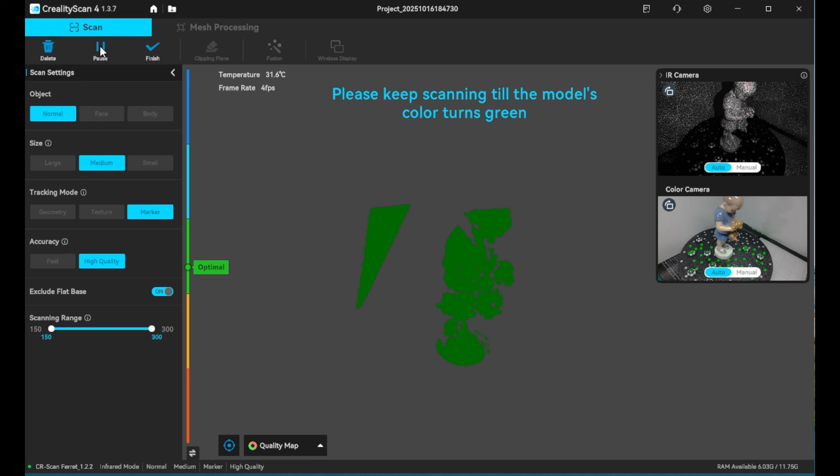Now it's green, that's what we want to see, so I'm going to go ahead and click start. And then I'm going to slowly start turning the turntable that I have my object on. And you want to make sure that it stays green. You want most of your object to eventually become a green color.

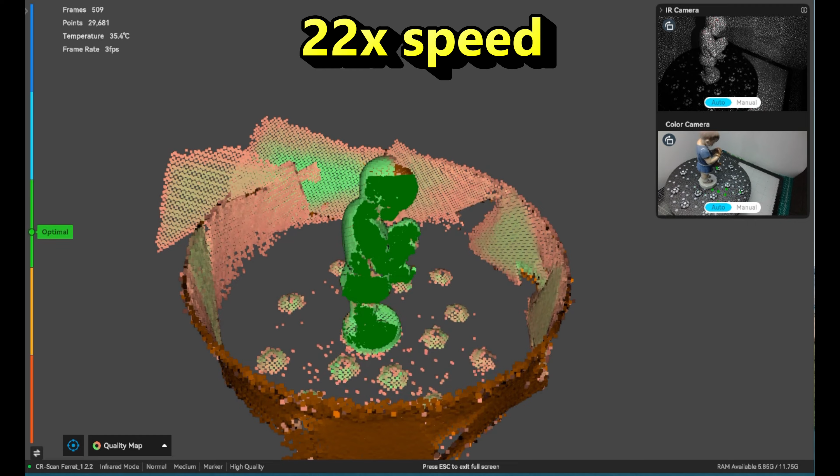And as the turntable is rotating, I'm going to be lifting the scanner up and down to try and get different areas of the model scanned. And whenever it turns red, I'm going to try and back it up to where it last was green to try and get as complete a scan as I can.

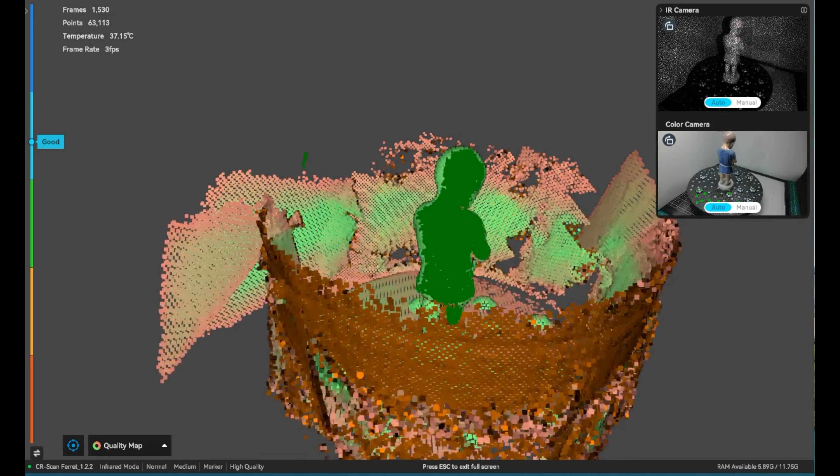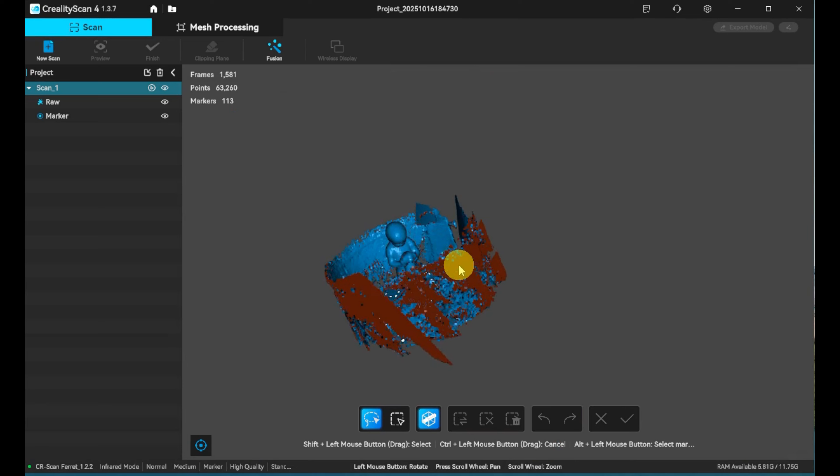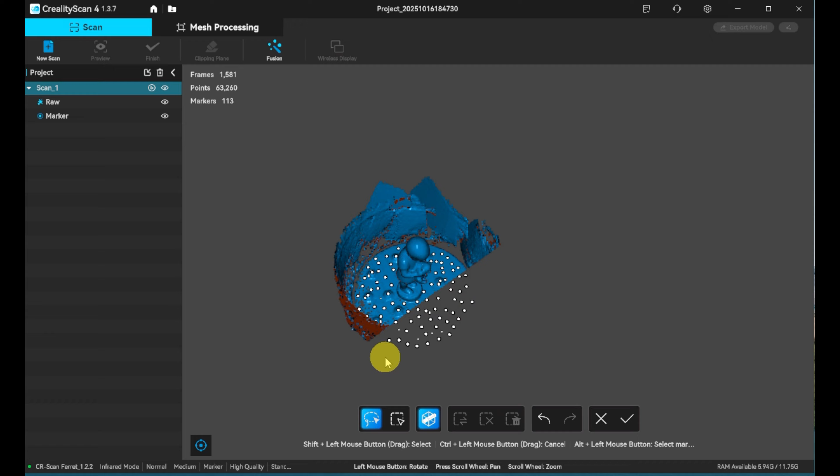Okay, now what we will do is we will finish this scan, take a quick look at how it looks. Let's get rid of some of this extra stuff. I'm going to use these two tools down here, the lasso tool and the rectangle tool. I'm going to hold down the shift key and I'm going to just select those and then delete the selection. And this way I'm going to just kind of clean it up a bit.

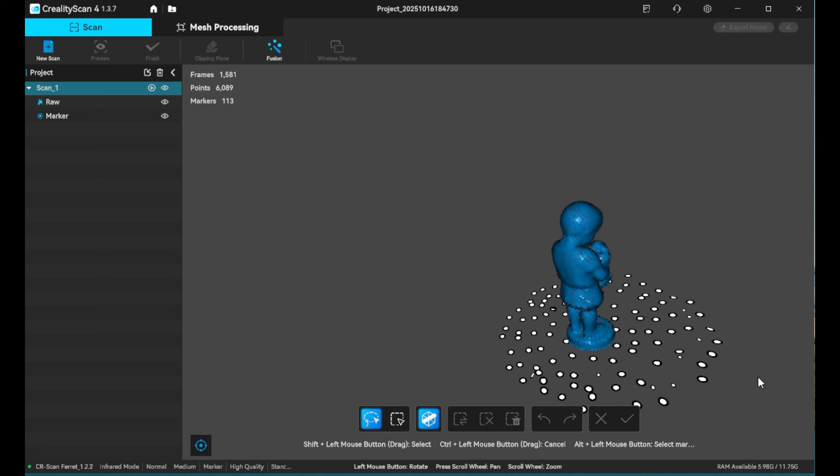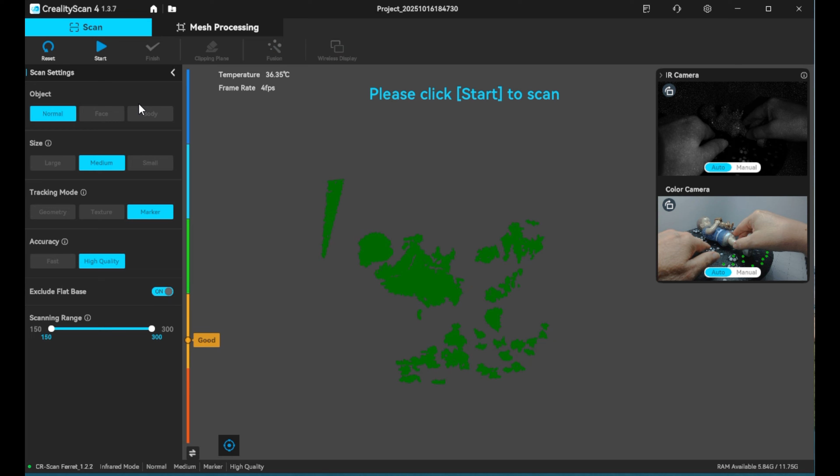Okay, and then it's very important when you're finished with that to make sure you click this check mark to save your edit. Now I'm going to do a new scan and we're going to preview. And I am going to lay the model on its side like this. And we're going to do a scan this way.

So I'm going to start, and then I will slowly turn the turntable. And once again, I'm going to move the scanner around while the turntable is turning, and I'm going to try and keep everything green and scan as much as I can until I get as complete a scan as possible.

Okay, and we'll go ahead and finish this one. And once again, I am going to do a quick cleanup of this. Okay, and that looks pretty good. We'll go ahead and save that edit. Now I'm going to do another scan. Let's preview it.

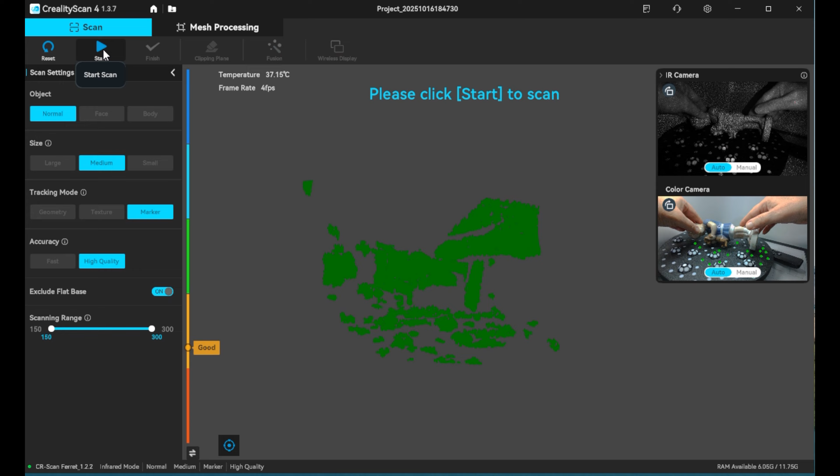And we'll put our camera up. And this time, I'm going to turn it this way. And we'll start. All right. And we will finish.

And I'm going to take away the marker view and let's clean this up. Okay. And once again, don't forget to save. Okay. Now I'm going to select all three and we are going to fuse them.

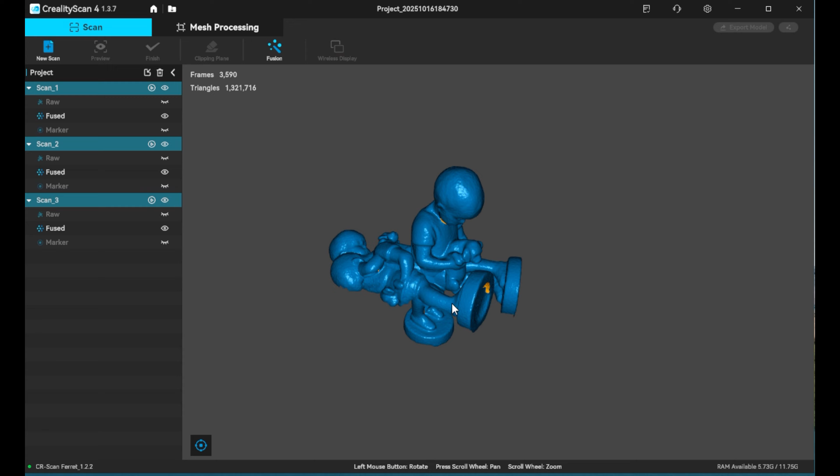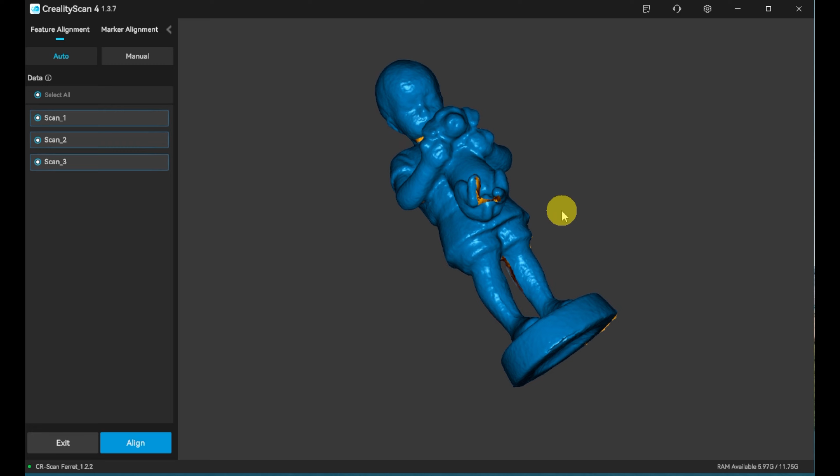Okay. Now that they are all fused, we're going to come up here to mesh processing. We're going to come to alignment and we are going to align them. Okay, and then let's take a look at it. It looks pretty good. There are some small holes. As you can see, there's a little hole in the neck and under the body and a little in the base here. So how we'll take care of that is we'll exit out of here.

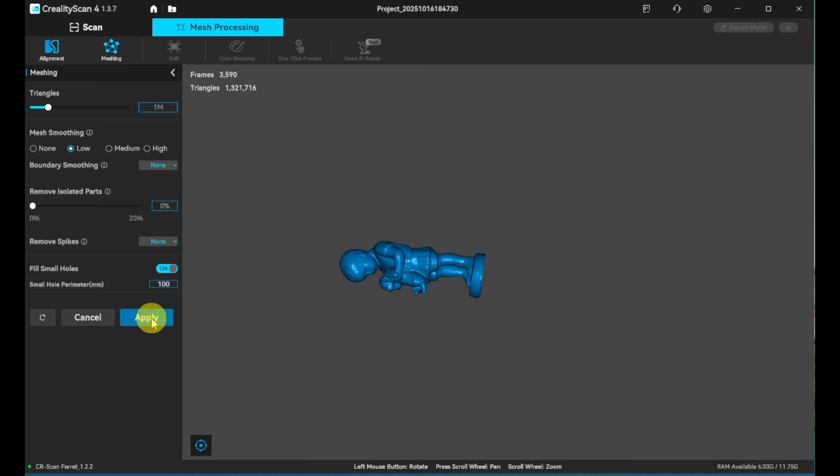We're going to come to meshing and small hole perimeter. I'm going to change this to 100. Mesh smoothing, I'm going to put on low and apply. And then let's take a look at that. That looks good. It looks like it closed all those holes up. So that looks very good.

So I'm going to export the mesh and we'll call this Little Boy Holding Dog. And we're going to save it as an STL. Okay.

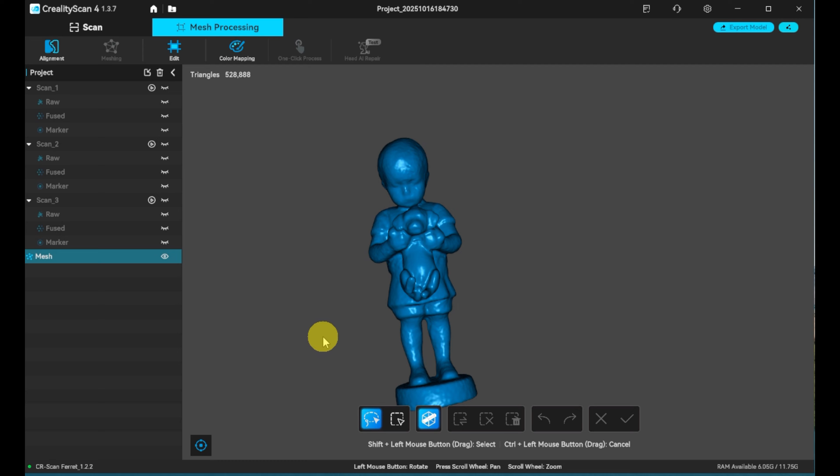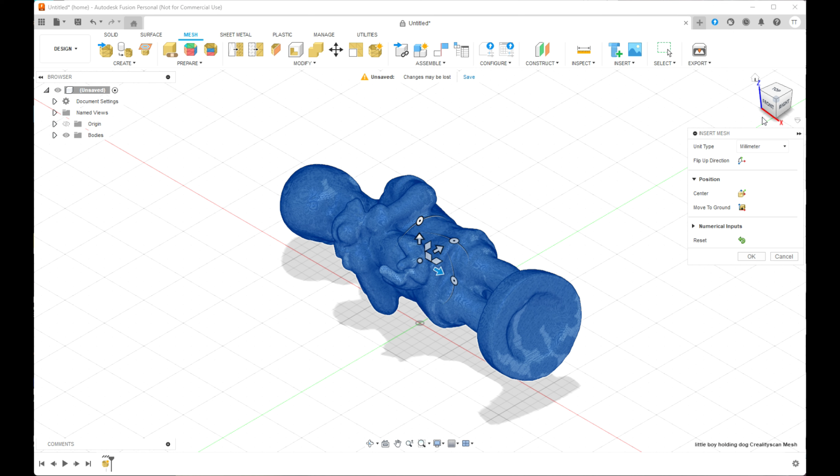Okay, now I'm in Fusion 360. I'm going to click on the Mesh tab. We're going to come to Create, and we're going to insert a mesh. And we are going to insert the mesh that we just created in Creality Scan. Now, with the Insert Mesh box open, don't hit Enter at any time or you'll lose the Insert Mesh dialog box. But right now I'm going to center it, and I'm going to move it to the ground, and I'm going to come and look at the front view, just so that I can keep things straight.

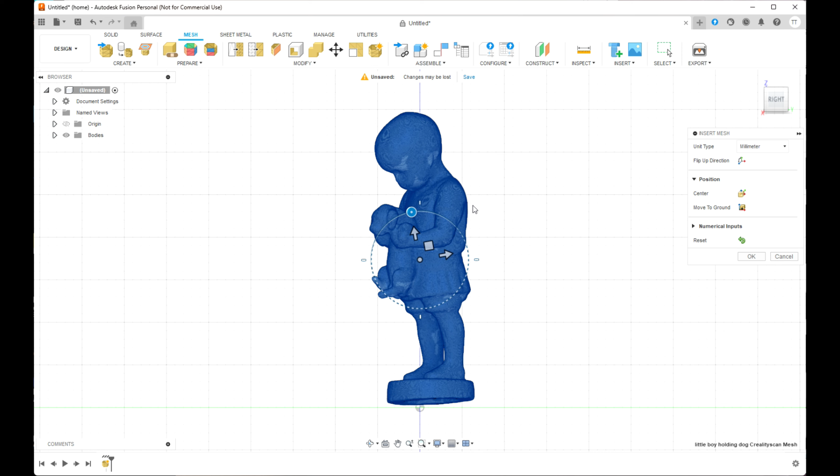Now I'm going to want to position this, and so I'm going to rotate it. Just like that. Let's move it to ground again. And I want to look at it on the plane. We can look at it right. And I'm just going to keep rotating this until it looks relatively flat.

And it looks like this needs to go a little bit that way, and that's too big. So if we hit the numerical inputs, let's maybe do a -1. And remember, don't hit enter, just type in the number. Let's try 1.5. Let's try -2. Yeah, -2 looks good.

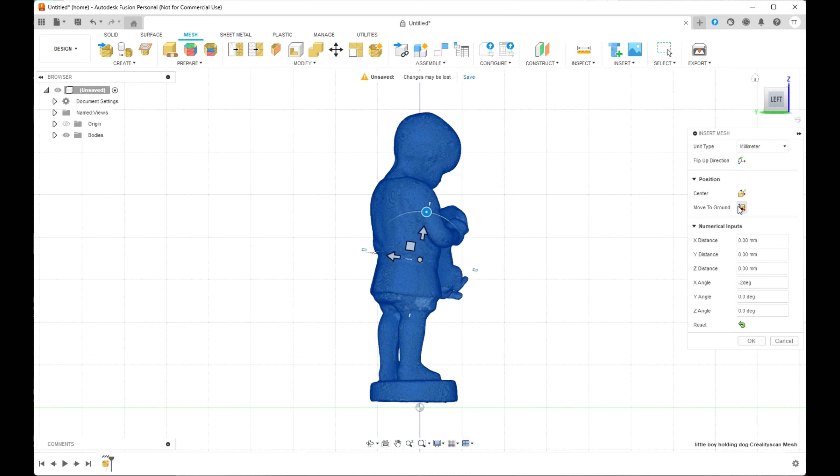And then we'll look this way. So that looks pretty flat to the plane all the way around. And then I'm going to move to the ground again. So now we are on flat on the ground. And so I'm going to click OK.

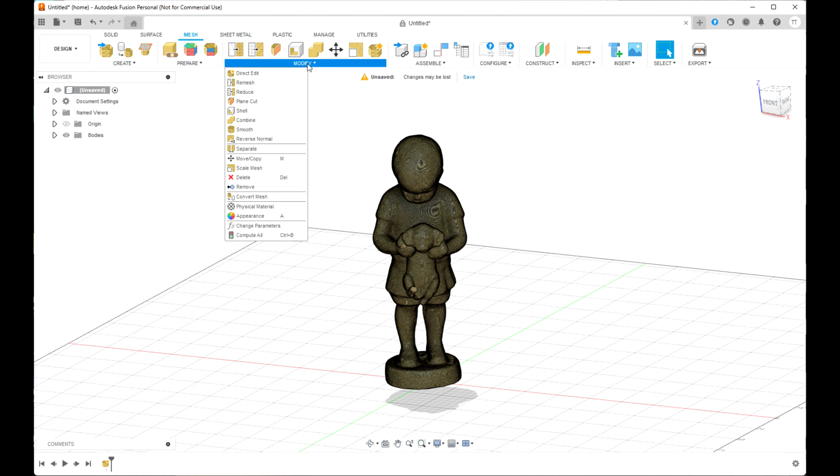Now I want to make the base flat. And so I'm going to come up here to Modify, and I'm going to do a plane cut. I'm going to select our body, and we want to select this bottom plane. So I'll select the bottom plane.

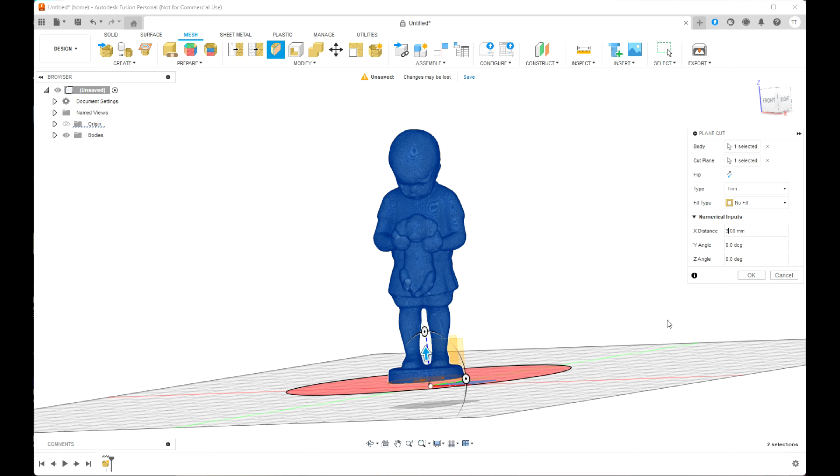And then I'm going to just pull the arrow up, which of course that is too far, although we could probably get away with this. I don't want it quite that far. I want a little more of a base for this boy. So maybe try 4, maybe 3. And you can see that will give us a flat base. So I'll click OK.

Let's go to Move, Copy. Let's hold this little boy. And let's get the front view again. And I want to bring it down to the plane.

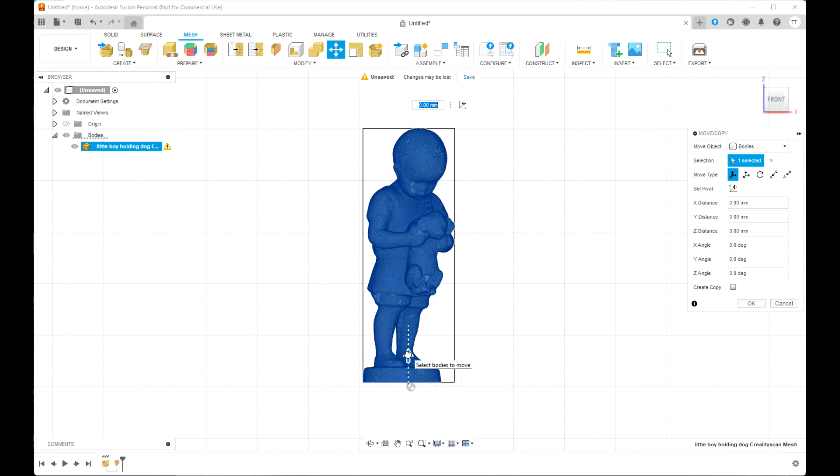So that's a little bit too much. Let's see if -4, that's a little bit too much. -3. Okay, that looks like that's flat on the plane, or pretty close.

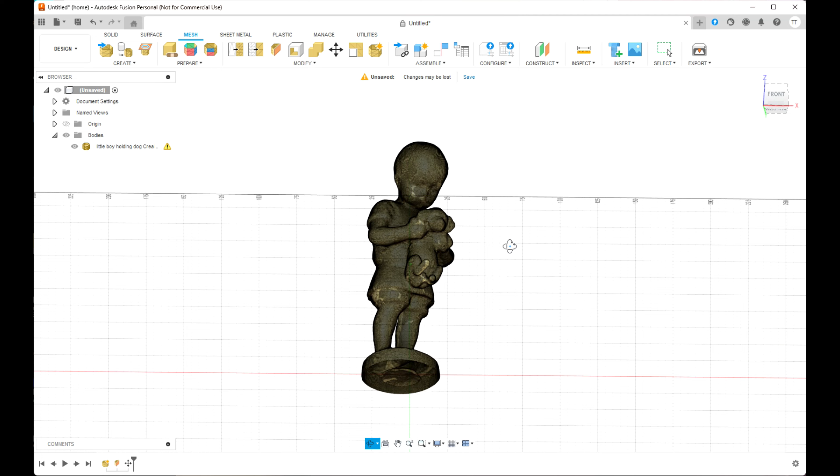So I'll click OK. Now you'll notice that we have a little error message here. And that's because when we cut on the plane, that put a hole in the bottom. And so we're going to need to close off that hole. So click on the little icon here.

We want to make sure that our item is selected. The repair type is we're going to close holes. And then just click OK. And so that has closed off the bottom and removed the error message from here.

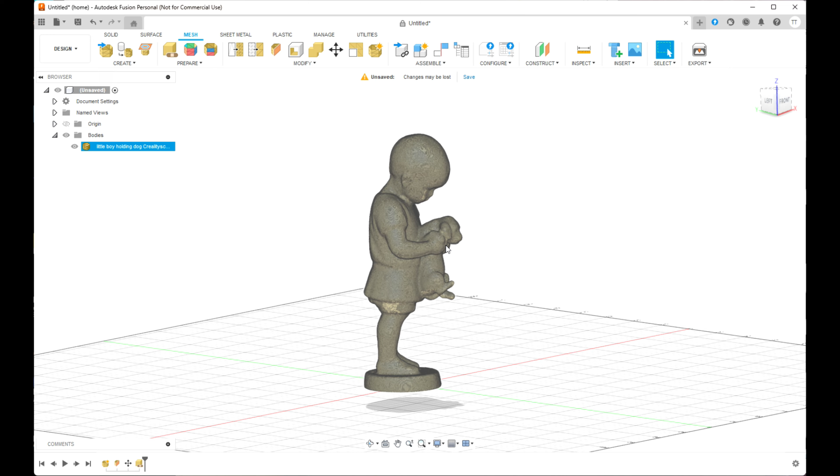Now we can probably just export this right now, especially with Bambu Studio. Even though this item is hollow, Bambu Studio is going to recognize it as being solid, and so it's going to put infill on the inside.

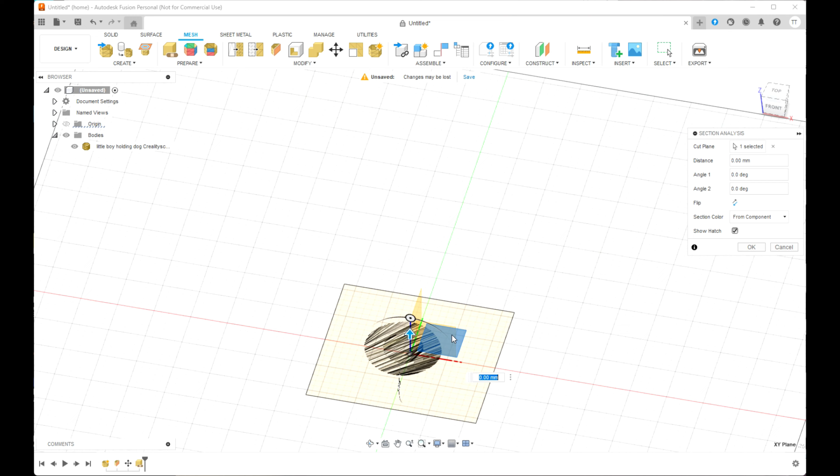And to show you what I mean, we're going to come up to here to Inspect and Section Analysis, and we're going to select this bottom plane. And as we come up, you can see we're hollow.

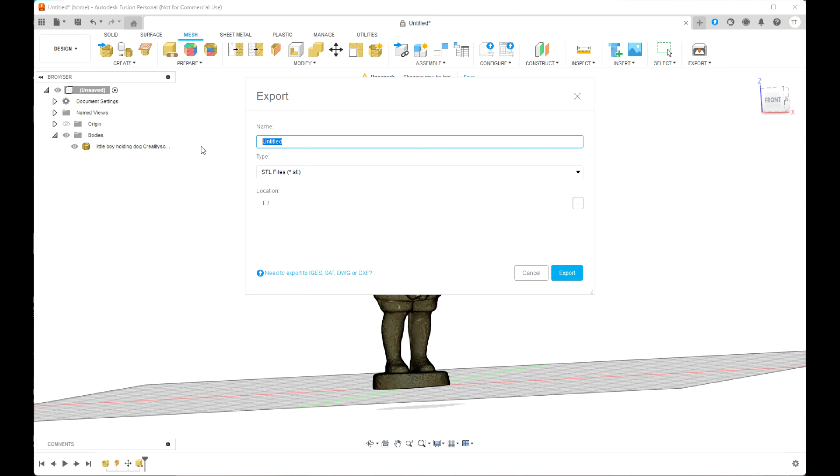And as I said, with Bambu Studio, we could go ahead and export this right now as is. We could come up here to File and Export, and then we could export this as an STL file. And in fact, let's export it. Little boy with dog.

And even though this is hollow, I will show you in Bambu Studio we can import what we just saved from Fusion 360. And when we select it,

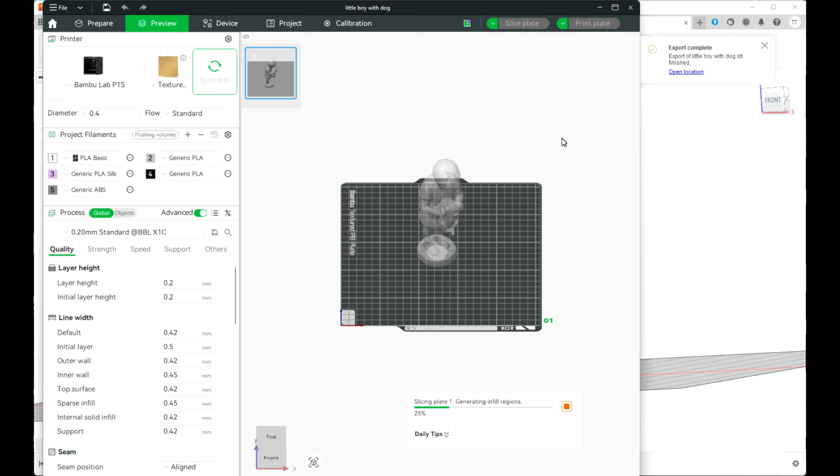Now this floating regions is because you really need to slice this with supports. I'm doing this to show you that it is putting infill. It's not going to print it as hollow.

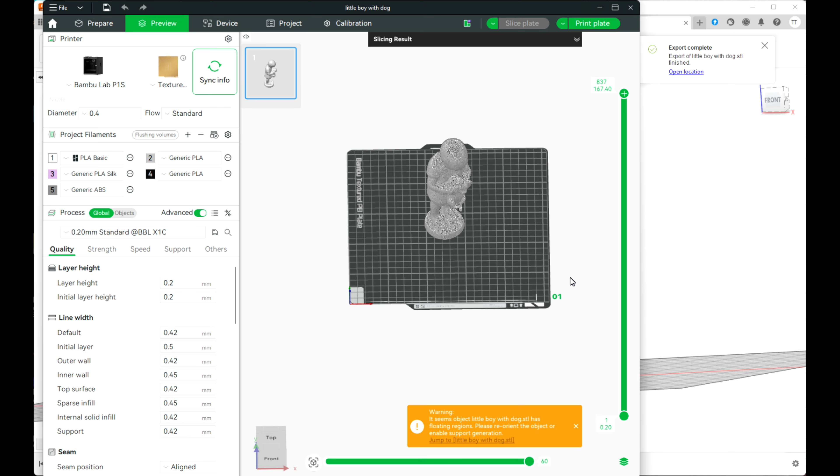And so at this point, especially if you have a Bambu Lab printer, I'm not sure about other slicers, but with Bambu Lab, you can use this as is and just turn on supports and slice it. And you're good to go.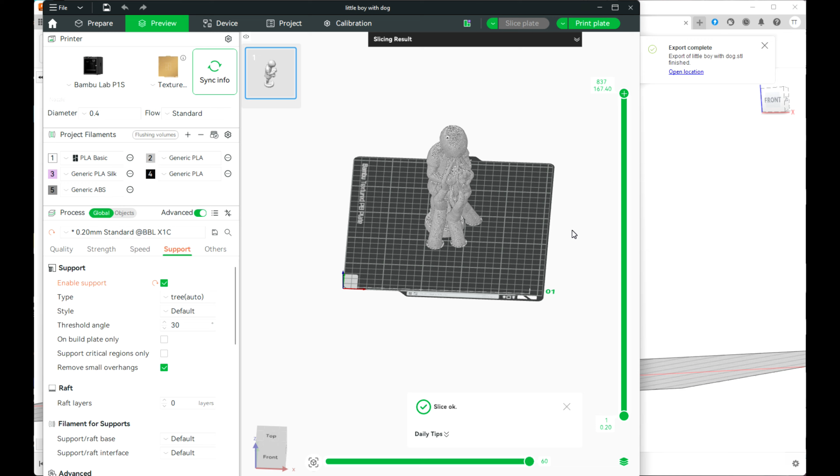We can change this to line type so that you can see where it's going to be putting supports. But in the event, if for some reason your slicer is trying to slice this as a hollow object, we can make this a solid object.

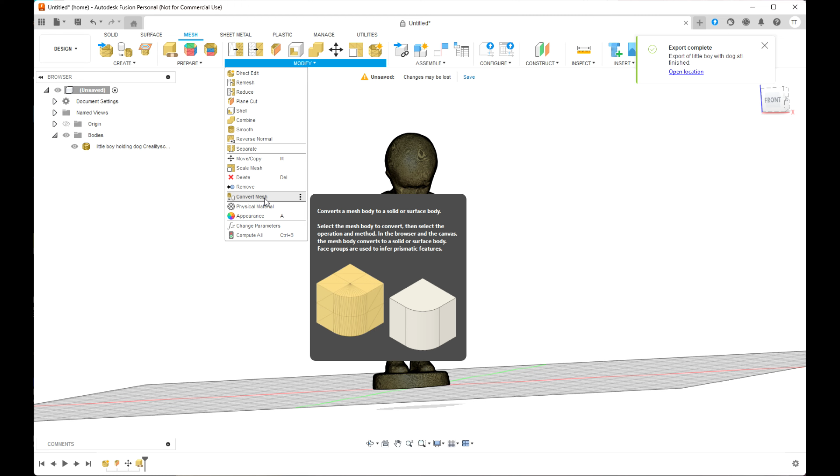To do that, we're going to come to Modify and Convert Mesh. It's going to be parametric and faceted. We're going to select our item and we're going to click OK.

Now, you may think it's not doing anything, but it is. You're just going to need to be patient. You may click OK again to see that it is really doing something, but just be patient and wait until it's finished.

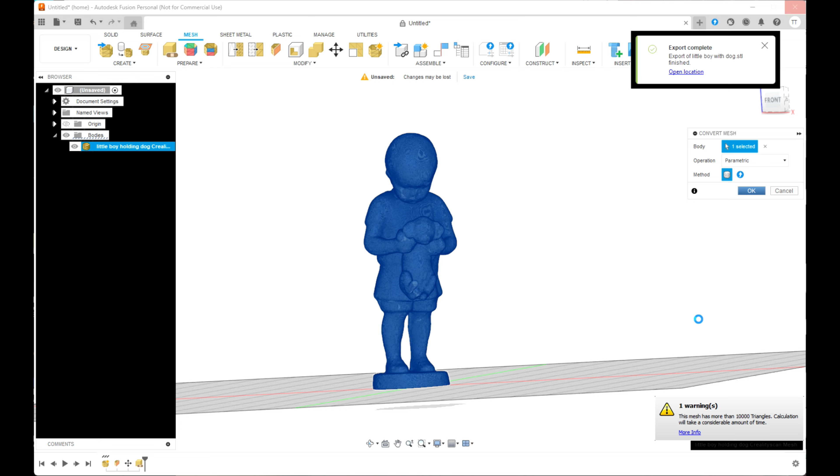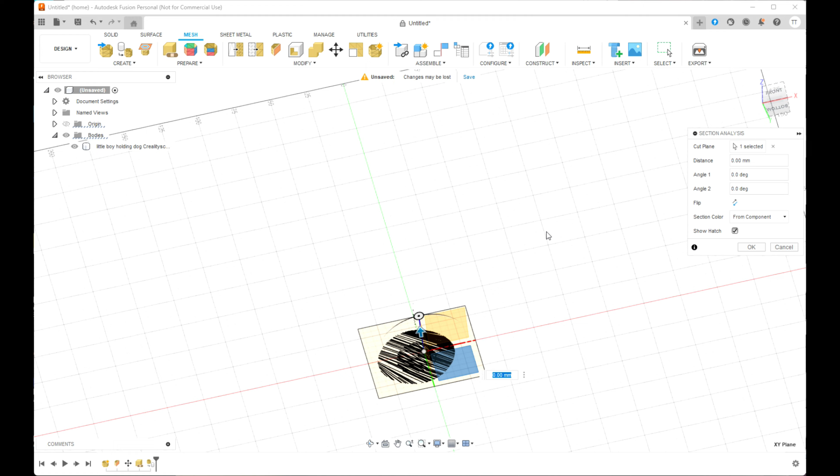Okay, when it turns black, it is finished. And to show you, we can inspect and we can do a section analysis. And once again, we want to select this bottom plane. And now as it comes up, you can see it's filled. And so that's how you can fill it.

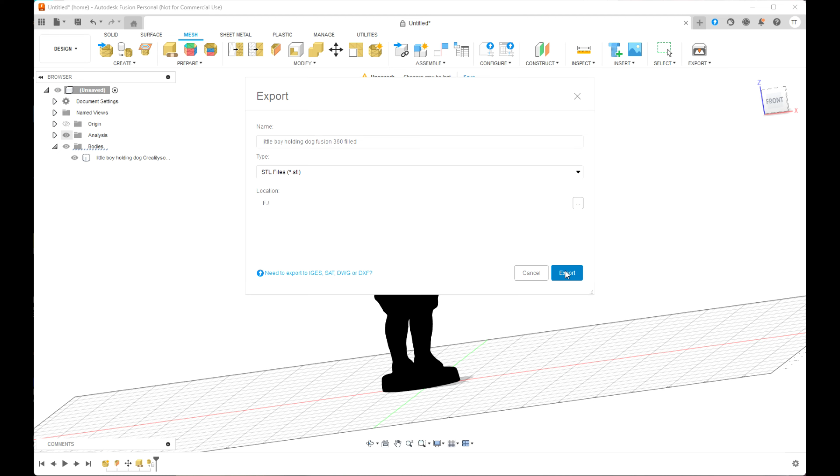And so we will come out here to File, and we shall export, and we'll call this Little Boy Holding Dog Fusion 360 Filled, and export. And so now we're ready to set it up in Bambu Studio.

Okay, now I have Bambu Studio open. The device I'm going to use is an A1 Mini, and I have got some generic silk PLA.

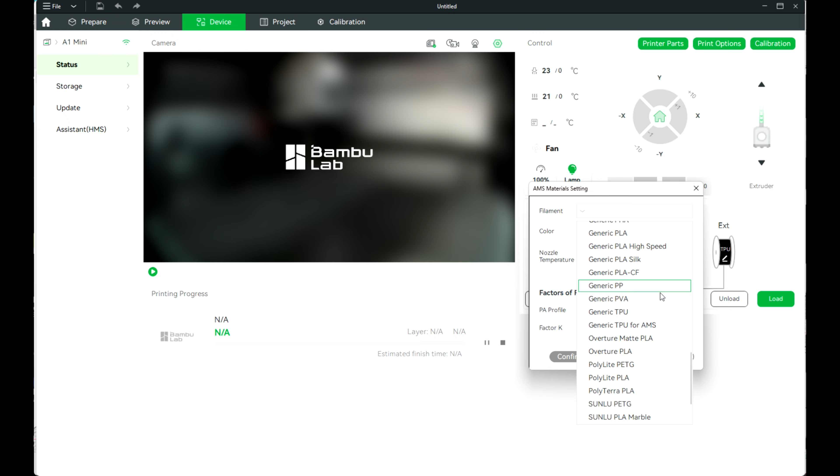And here I'm going to switch to my A1 Mini, and I will synchronize the filament, and we will import the file we just made. And that is right here.

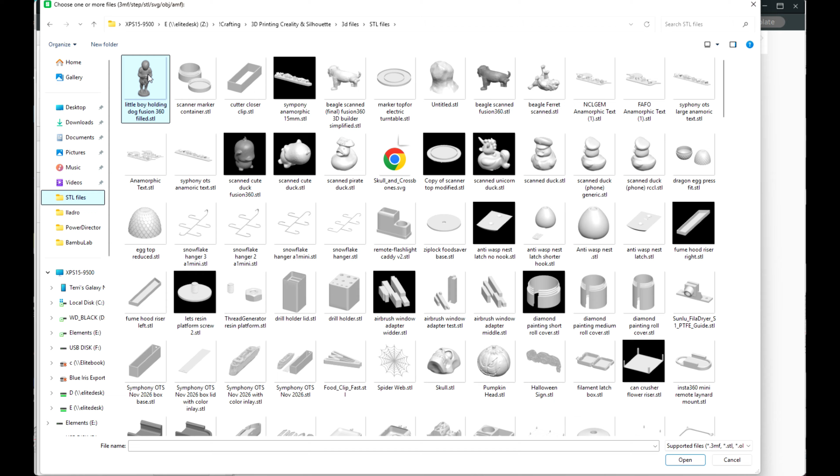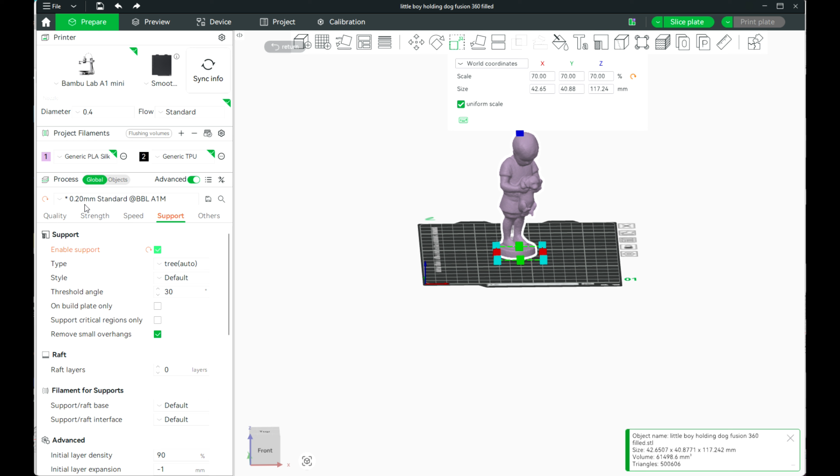Now to save on filament, I'm going to print it out a little smaller, so maybe at about 60%, or maybe 70% size. And I'm going to enable supports, and I'm using the 0.2 millimeter standard protocol, or 0.2 layer height, so that profile. And this is what it's going to look like.

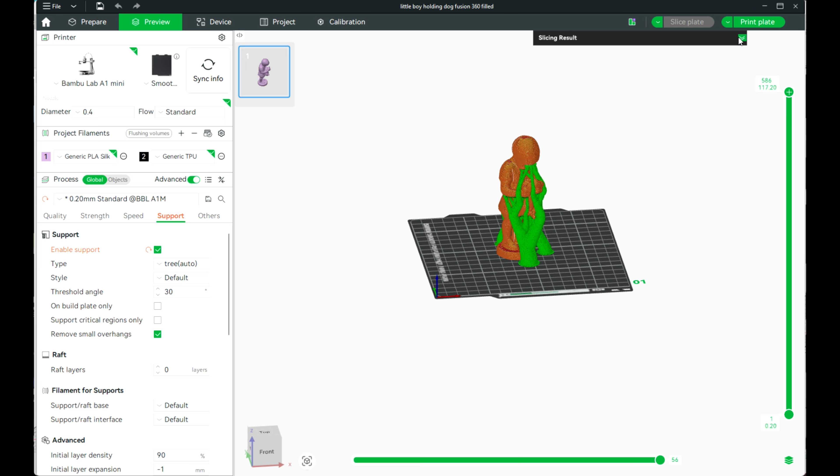And so let's send it to the printer. When it's finished, we'll be back. And this is going to take about 24 grams, or actually about 31 grams total filament, and it's going to take about 2 hours to complete.